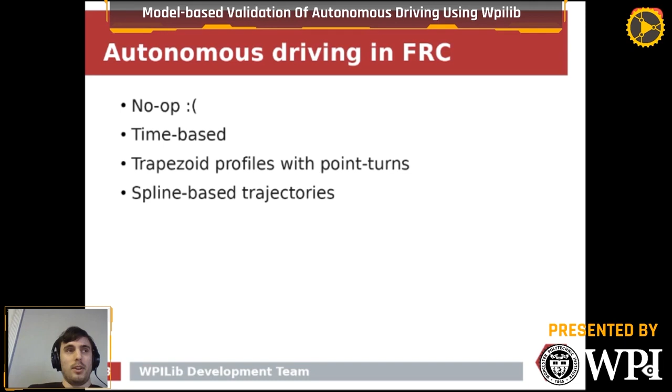That's what we're going to be showing today, because starting in 2020 we have support built into WPILib to make that possible. Is that the Pathweaver stuff I've seen? Yes, that's Pathweaver, and then there's trajectory generation libraries.

So first we're going to introduce some basic concepts. We're going to introduce localization, which is how you figure out where your robot is. Motion planning, where you figure out, based on where I am, how do I get to where I want to go. And then control, which actually gets you there.

And we're going to show this using the WPILib 2020 features. Then towards the end, we're going to show a demo using my team's robot code, because we have the whole drivetrain simulated.

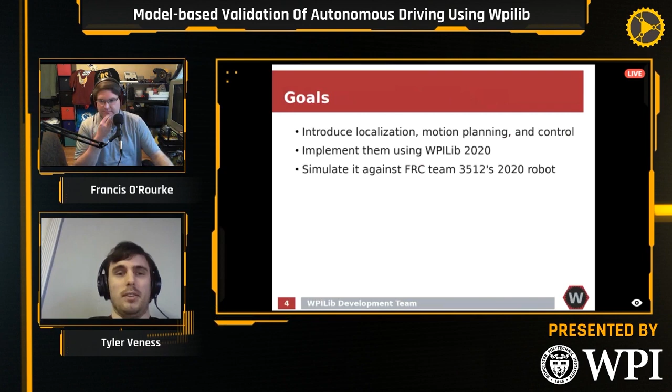Localization is a term that means using external measurements to figure out your drivetrain's position and orientation on the field. We call that a pose. So you have, in two-dimensional space, your X position on the field, your Y position on the field, and your heading, which direction you're pointing. You can use measurements like your gyroscope and your encoders to figure out where you are.

Once you know where you are, you can figure out where you're going to be using successive measurements over time. A lot of what I've done in smaller robots—I'm not myself a controls programmer for FRC, but I've done a lot of smaller robots—is the prevailing method using encoders and the gyro, as opposed to trying to use external ultrasonic sensors to find landmarks? Or is that a whole different theory?

They all follow under the same umbrella. There's a couple different ways you can figure out where you are. All you need is a mapping from what your sensors say to what your pose on the field is. That could be a range measurement to an object, if you know where that object is. That could be a gyroscope that tells you your heading directly.

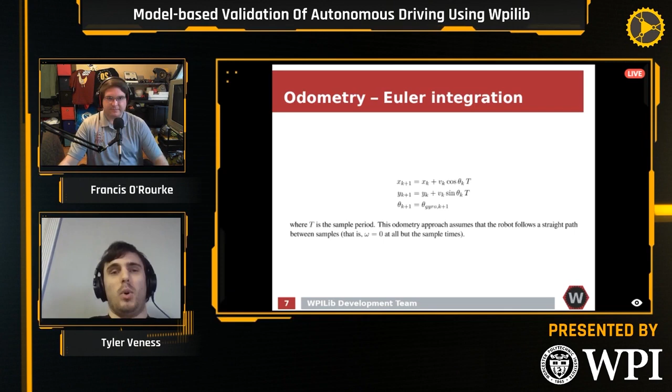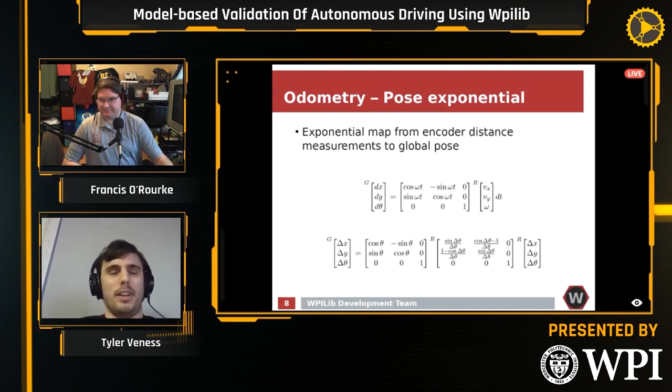But what we're going to do next is show how we can include the case where you have a constant turn radius, so we can get a more accurate reading. And the way we're going to do that is we're going to get our velocity forward, which is x. Oh, and the coordinate frame we're working with, I forgot to mention, x is forward and y is to the left. And because x is forward and y is to the left, when you do right-hand rule, angles are counterclockwise positive.

So this is linear algebra. Don't let the notation intimidate you, right? So it's pretty similar to what we had before, but we're using more generalized language. So we'll start from the left side. So this thing with 3 rows and 1 column is a vector. We have 3 elements in it. We have a small change in x, which we call dx, a small change in y. So these are really small increments, as you're moving. Right. And then so you have one in x, y, and theta, where theta is the heading.

And so the superscript g means global. So this is saying, I want to get a small increment for my change in my global position. And we want to use the velocity and the angular velocity to get there. So on the right side, you'll see that 3x1 vector. You have your x velocity, your y velocity within the robot's coordinate frame. So x is always forward in the chassis and y is always to the left in the chassis. And then omega is your turning rate.

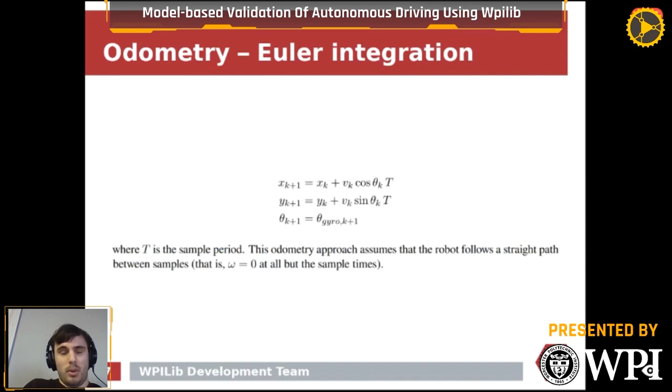So this is pretty similar to what we had before, where you have your velocity component times some time. And we're doing the same thing here. We have the velocity times some increment of time, dt. And then we're saying, okay, that's the velocity in the robot's coordinate frame, denoted by the capital R there. So how do we get from the robot's coordinate frame to the global? Well, we use a rotation matrix to do that.

And what that says is that we give it some angle to rotate, and it's going to spin that vector there with your x and y components by some heading, so that you now have the X and Y components in the global frame instead of the chassis frame. So think of the gyro angle, and so you'd rotate by the gyro angle to get from going forward.

And then if you're pointing, say, 90 degrees to the left, then it's going to rotate all of your vectors, so that if you were going forward and facing towards the other alliance wall, that's an angle of 0. So there's no rotation. If you were to rotate 90 degrees, now your X component is pointing in the Y direction, because you rotated by 90 degrees. Okay.

So back to the rotation matrix. What we're going to do is take all of our vectors and we're going to rotate them by the angle at t. So we're going to start at time equals 0, and then we're going to go at 0.1 seconds. And as you are rotating, because you have an angular rate, the omega, when you multiply by t, you get an angle back. Because remember that you take your rate, multiply it by time, you get a position. And this is angular position.

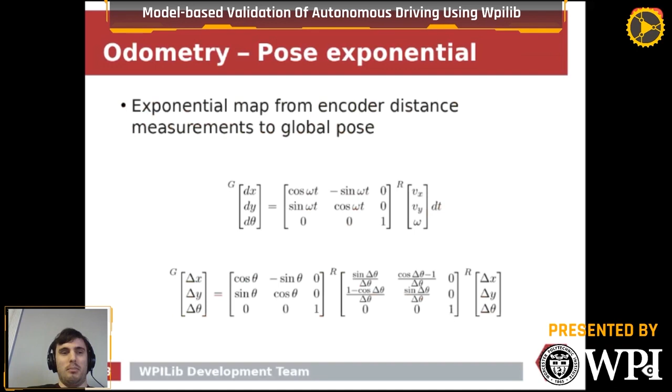And so that's the odometry method we're going to be using. And then it'll be nicely packaged for you, so that you can take what your encoder measurements were in the X direction and your change in your heading, and it'll turn it magically into a global pose for you.

And then next we're going to cover controls. So how to get from where we were to where we want to be. And control theory is this whole umbrella discipline that lets us model our systems and then predict how they're going to behave. So you can think of it like, how do we know that our car's cruise control is going to be safe? How do we know that it isn't just going to go unstable and run us off the road or whatever?

And the way we do that is by representing what the car is going to do mathematically, and then proving that mathematical model is going to do what we want it to. And we can prove other things too, like if you get a gust of wind, that you're still going to go the direction you want to go. And so we prove that we have robustness guarantees in the face of uncertainty. Or I think in our application it would be more likely to be another robot coming and hitting you in autonomous, right? Yes. Yep.

Yeah, and also battery voltage drop, friction in your gearbox, drift in your gyroscope. So I guess the bigger answer is probably it depends on the application, but could you use this to make up for significant issues you may be having with the driveline, if this is being used for driving? Say, for example, one of your motors becomes unplugged. How much do you think this would be able to facilitate correcting for it?

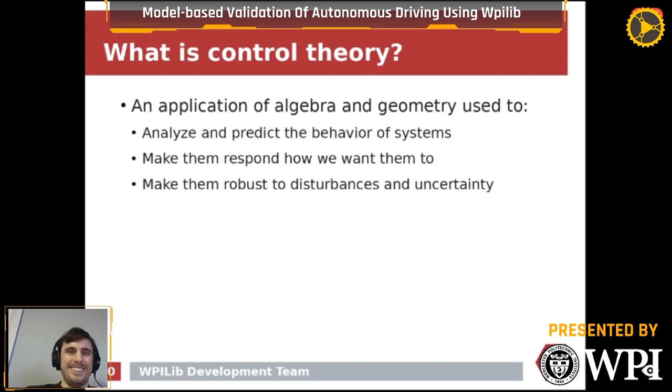So we're going to cover a couple different types of controllers. There's two categories: there's feed forward, and we're going to cover what feed forward means in a bit, and feedback. And we're going to cover each of these types. So feed forward, I guess we'll get to that in a little bit.

So feed forward is, you're saying, well, I know how I want to get my robot from point A to point B. I have this trajectory I want to follow. And if I know how my robot's going to behave mathematically, I can say, well, I don't need my feedback control to be like, oh, there's an error in my encoder position, I need to correct for it.

You can be like, well, I know I need to go from this encoder position to that encoder position. And I know how a voltage maps to what that change is, so I can back that out and be like, okay, given the change in encoder positions I want, I can figure out what voltage I want to apply. So instead of waiting for errors to occur before you act on them, you can proactively drive your robot to the destination and react faster to disturbances.

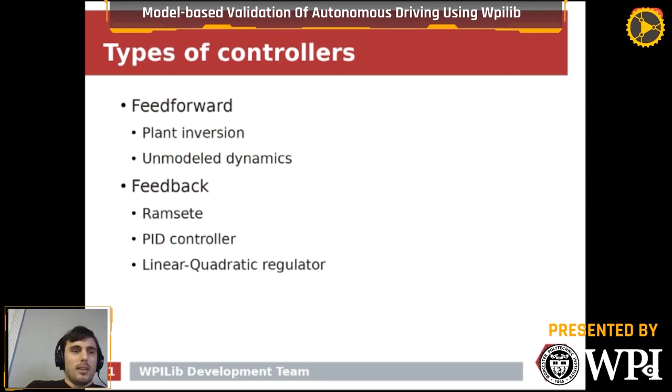And plant inversion is the most common way of doing this. So don't worry too much about the notation. This is just a standard form, and it'll be easy to explain algebraically. So we have a model that says, x is things like our velocity. Say a flywheel that we have. We have the current velocity, and we have the input as a voltage.

You can apply a positive voltage, and that'll accelerate it, which means your velocity is going to increase, because you see that plus Bu. And then the A will be negative, because it'll be like your back EMF. When you apply 12 volts to a motor, and then you apply 0 volts, the motor slows down, right? So with a DC motor, it's essentially a generator.

Right. So think of those old flashlights with the cranks on them, you turn the crank and then it lights up a light bulb. Yeah, exactly. So you can generate power, but it requires work to do so. And so that work is what's slowing down the motor. So you're applying voltage to it, and that electrical voltage is being converted to mechanical work. That's what a motor does.

Right. But it works in reverse. You can have mechanical work done on the system and generate a voltage. So if you were to push your robot, you might have noticed how you push it fast enough and things start lighting up. And the LEDs start blinking because it's a generator. Yeah. Right?

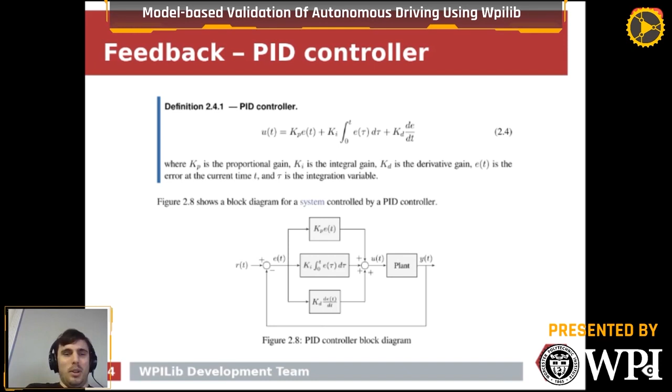So when you're doing motion profile following, that's what your two terms are doing. You've got your proportional term that's on position, and then you have your derivative term that's on velocity. And so when you're following, say, a trapezoid profile, you have a term on position, a term on velocity. And as long as your motion profile is doing something that the thing can actually do, then it can follow pretty well. And we'll show that in a bit.

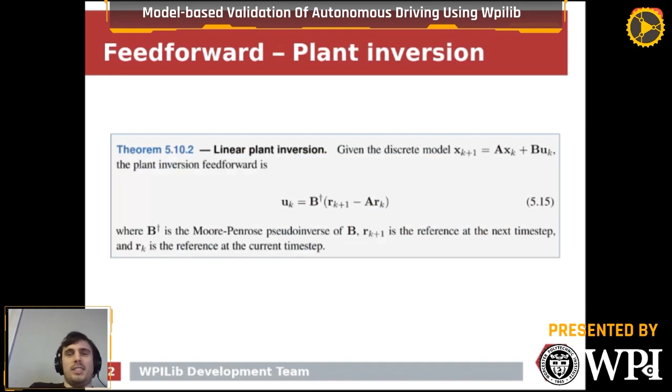So that is for linear control systems. By that, I mean, remember this equation here, everything is a linear combination of variables. You have a constant times your velocity plus a constant times your voltage, and that gives you your next velocity. So with drivetrains, the actual model is nonlinear because you have a heading. Remember those trig functions we saw in the odometry? Those trig functions make our model nonlinear, which means linear control theory starts to break down a bit because it assumes a different form.

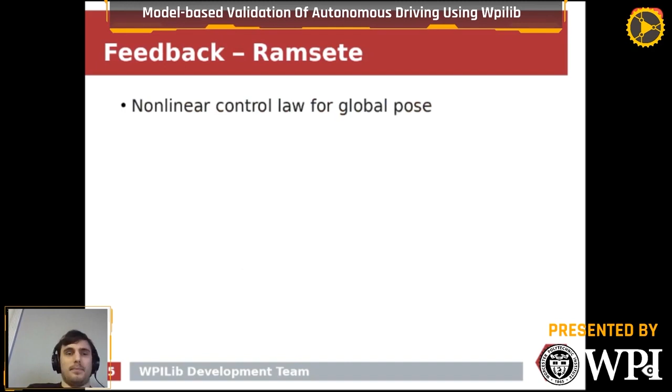And so Ramsete is this control law that we implemented last year that's used for correcting your drivetrain based on where you want to be on the field, your desired pose, and your current pose. And it'll give you a velocity and angular velocity for the linear controllers to follow. So what we're doing here is taking our linear PID controllers on our wheels and augmenting them with this outer controller. So it's like doing higher level planning. And so let's look at 8.35.

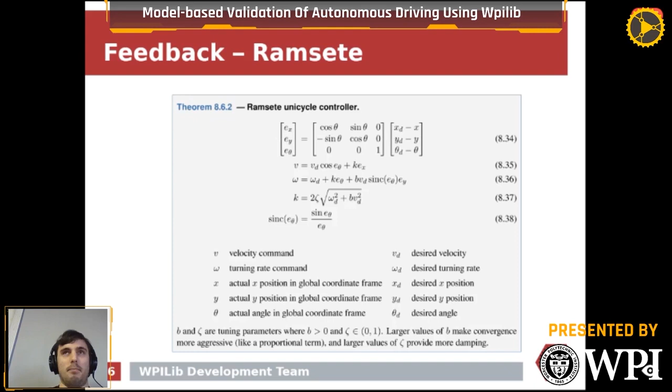So the trajectory planning was originally designed for differential drives. When you're planning a path for a mecanum drive to follow, you can actually ignore the heading on that trajectory. It's a free variable. Right, because your translation is independent of your robot's rotation. Correct. So we recommend teams just generate a trajectory, then make the heading do whatever you want. You can make it a trapezoid profile, or a constant value the whole time, because you're not limited to driving in a specific direction like differential drives. So consider this presentation the harder case. Okay, cool.

I've been talking about motion planning, so here it is. With motion planning, rather than changing your set point instantaneously from 0 radians per second to 500 radians per second, which the system can't do, and it's going to lag behind, we change our set point only as fast as the system can actually move. That gives us a more predictable system because the actuators are within their limits, so the feedback control has more authority to keep you within your tolerances.

And you can also apply feed forward, because now that you know you can actually go from the current state to the next, you can calculate an input that is actually possible, which means your system is smoother, more predictable, behaves better, and is more resistant to disturbances.

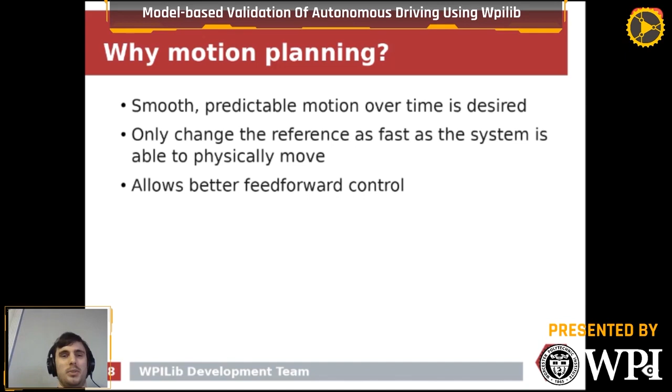Things like CNC machines use higher degree profiles because it lets you deal with jerk; the higher order terms you make controllable, the less vibration you get. And jerk is the rate of change of acceleration, the acceleration of acceleration, correct? Yes. But with FRC, generally we only need trapezoid profiles.

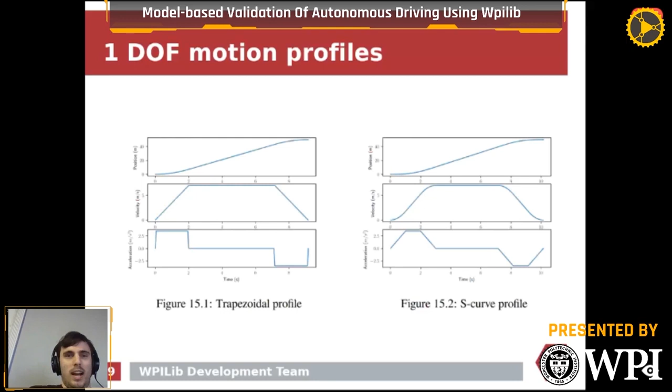To get some vocabulary out of the way: a path is a set of points that you want to follow. A trajectory is a time domain version of it, like a profile where time progresses forward and velocities and positions are mapped, whereas a path is just a set of points. I see some people mix those up. So with a 2 degree of freedom motion profile...

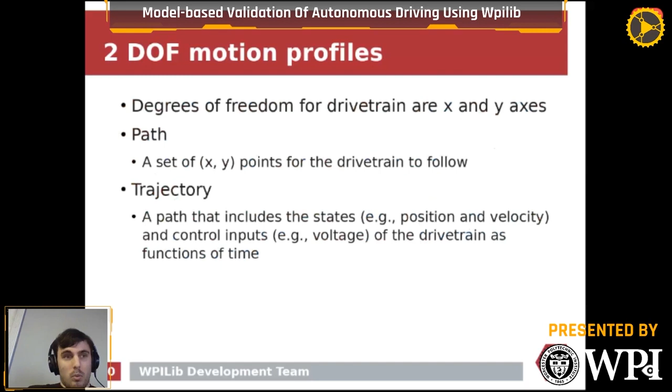The way we implemented it in WPILib is 2 types of splines: clamped cubic splines and quintic splines. A spline is a curve where you specify your endpoints, so you'd start from where you are and where you want to go, and it finds a smooth path between the two. It interpolates between them.

With clamped cubics, you can specify your start and end poses and then your intermediate translations, and it'll pick headings in between for you. Quintic lets you specify headings at every waypoint. So to say that again, you can specify waypoints, which are specific poses you want to go to throughout your trajectory, and splines find a smooth path between all of them.

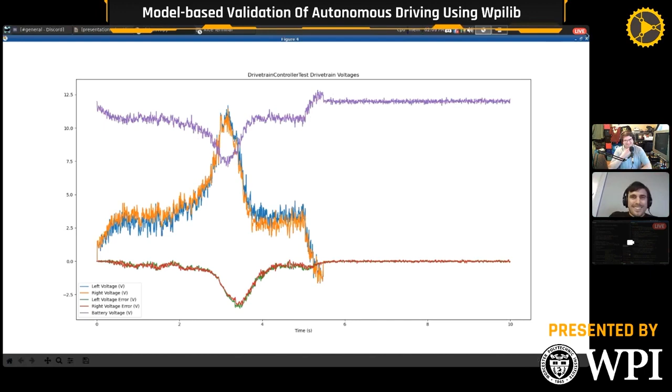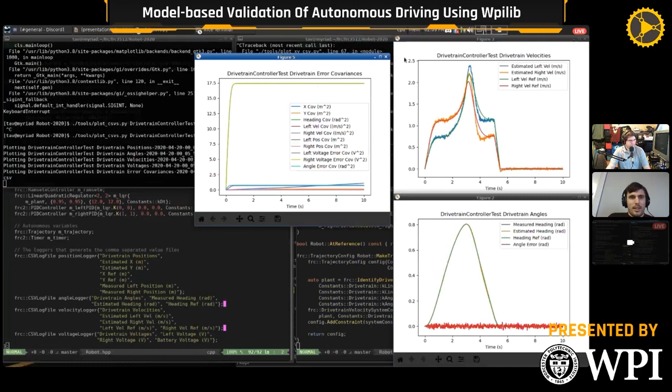Let's see. I guess I'll show you a little bit what the code was that generated those.